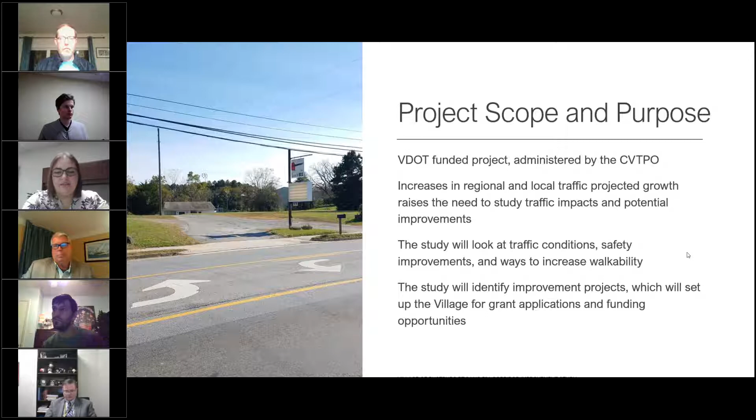The project purpose and scope: this is a VDOT funded project which is being administered by the Central Virginia Transportation Planning Organization. The need for this study has been increased by regional and local traffic and the growth that's projected. So the study will look at traffic conditions, consider safety improvements, and ways to increase walkability and multimodal access. The study will identify improvements that will set the village up for funding opportunities in the future. This initial meeting is really to get your feedback on the issues you've seen and the concerns you may have, and then we can move forward in identifying what improvements can be made.

Starting here, we're in the initial phase, which you can see on the left-hand side of the screen, which is doing the initial traffic analysis. We will go on to create the study and make plans, seek funding for those, and eventually get to construction. So we're in the pretty early phases of the project, and this is the best time to start getting your feedback on what you would like to see in the future.

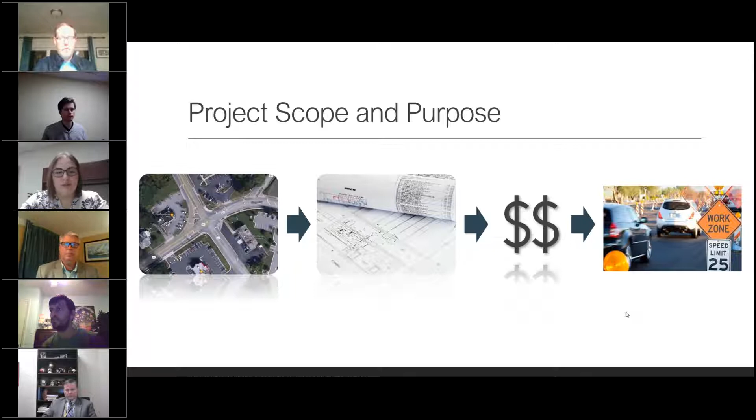So I'm going to hand it over to Bill, who's going to continue on.

Okay, thanks, Ada. As we go through the presentation tonight, really the purpose of this is to get your input. So please think about questions you might have and the type of input you might have. What concerns you about the corridor? Would you want to bike and walk more in the corridor if it was more accommodating? Are there specific locations that are of concern? Overall, what kind of ideas might you have for improving the quality of the corridor in terms of congestion reduction, safety, and the ability to walk and bicycle in the corridor, and whatever else comes to mind. That's what we want to hear.

So thinking about Rustburg, let's start really high level here. The town has been there quite a while, since 1784.

Looks like Bill might have some connectivity issues. Is anyone else getting that? Some connectivity issues? Not hearing Bill either. Okay, I can continue on for where Bill left off, and then once he jumps back in, we will let him go.

Just a little history and context of Rustburg: it's been here since 1784, when Jeremiah Rust donated the land for a courthouse and a jail. The village of Rustburg has grown to include a complex of administrative buildings, local businesses, and nearly 1,500 residents. The village is designated as an activity center in the Campbell County Comprehensive Plan, which indicates that it draws people.

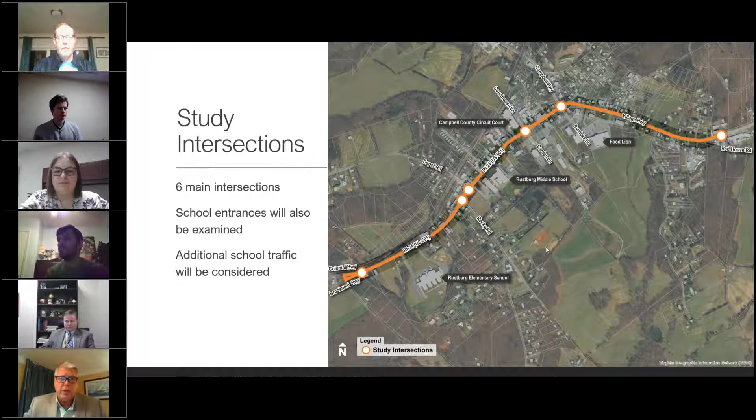I think there might be a delay on your end, Bill. Yeah, there must be. Okay, thanks.

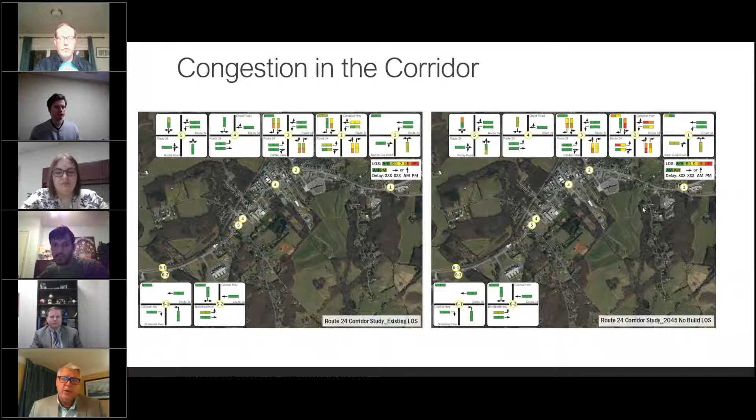The image on the left here, we see a lot of yellow and orange around the key intersections of Carden and Campbell Highway, so you're probably familiar with experiencing some delays there in the morning and evening commute peak hours. Then the image on the right is where we plug in the future volumes that are projected, and we start to see more yellow, orange, and red. So the more orange, yellow, and red you see indicates increasing congestion. We already know going forward there's going to be more congestion, so we need to get out in front of this from a planning perspective to figure out how to address it most effectively.

Next slide. Bit of delay on my end.

In addition to congestion, we're thinking about safety in the corridor. Are we experiencing crash issues? Is the corridor overall safe to drive, walk, and bicycle in? Next slide.

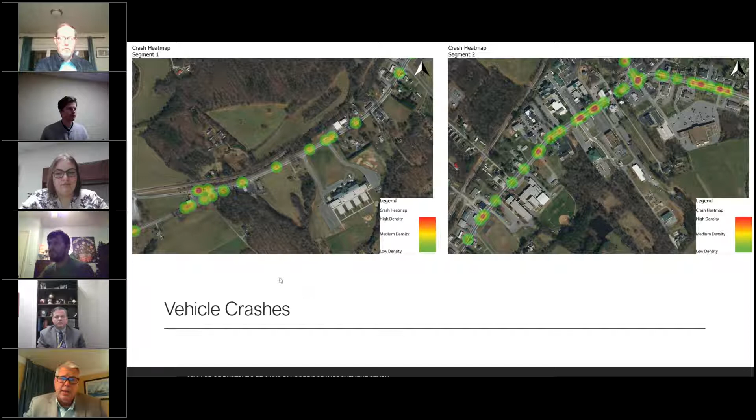Now this graphic is a different way of looking at it, called heat mapping, where we've mapped the intensity of crashes. We start to see places along the corridor with the highest crash history. The red indicates the higher crash history, around Carden and again around Campbell Highway. Interestingly, on the image on the left side where Colonial Highway comes in from the west, we see a concentration there too. So these are just some of the things we're looking at, and we want to hear from you about your observations of the corridor, from the people who use it frequently.

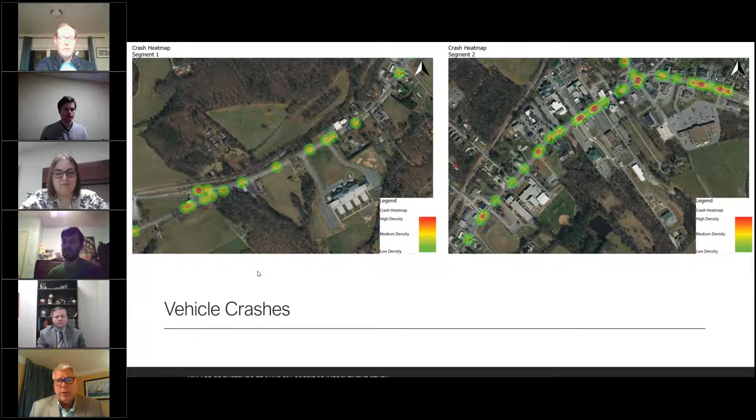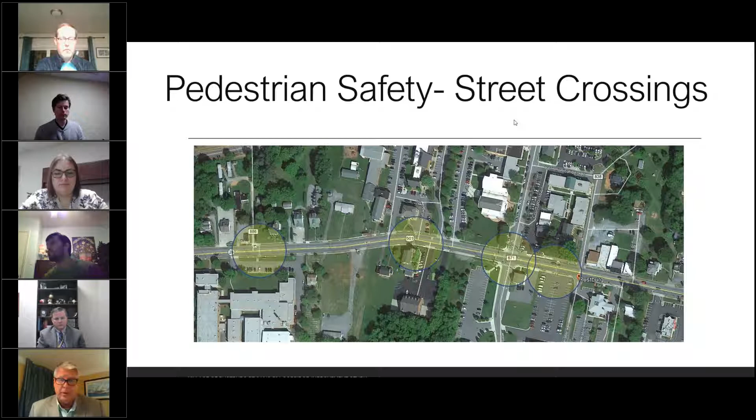Apologize for the delay here. This graphic, those yellow circles, are highlighting crosswalks through the core of the village. The point of this slide is that historically this has evidently been where people want to cross the road. So part of the question is, how comfortable and how safe do you feel doing that? Are these the right places to cross, or are there other places that are frequently crossed by pedestrians?

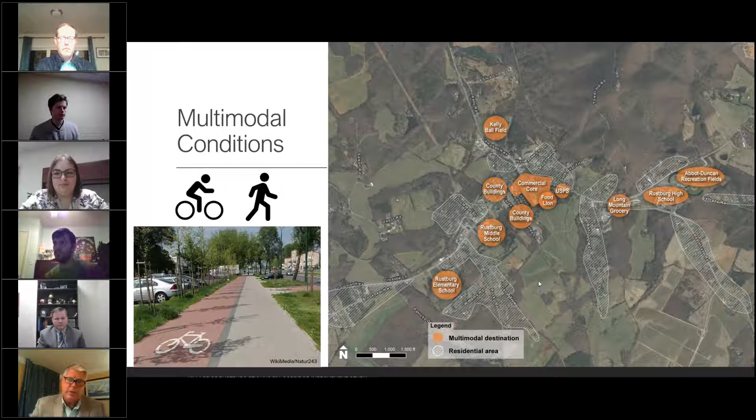Ideally, it would be comfortable for the residential areas to be able to access the commercial and institutional areas. So think about where you might want to walk and how you might want to get around on foot or bicycle. We'd love to get your input on that.

Also, when we think about the corridor as a whole, we're looking at traffic congestion, safety, multimodal mobility, but we're also thinking about whether there's a need to beautify the corridor in terms of streetscapes. These are great improvements to help enhance the overall sense of walkability. They can also be drivers of economic activity - helping a commercial district look more vibrant, attracting more economic activity, improving the tax base, and improving the overall quality of the village. So we'd like to hear your thoughts about that.

And as we seek your input, this is one opportunity tonight. We're here at the very beginning of the study process, and we have a survey tool that's available. It's very effective, and David Cook from VDOT is going to give you a tour of the survey tool.

You ready to share your screen, David? Yes, I am. Thank you, Phil. Okay, pass it over to you. And I want to confirm that everybody can see the CVTPO homepage. Yes. All right, good deal.

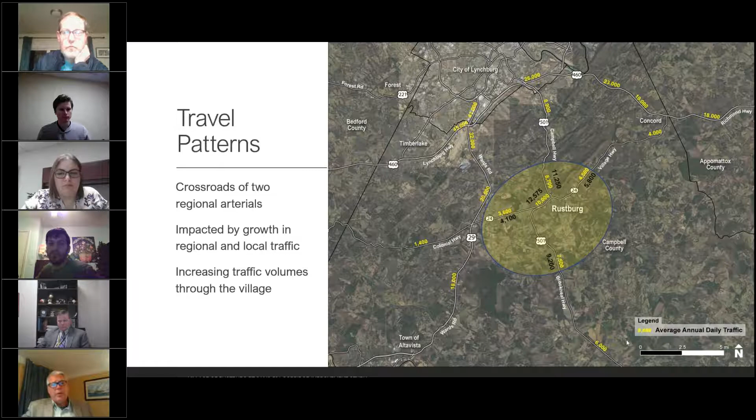Sure, maybe I could go back to the volumes slide. The need for this study really hinges around trying to make a safe travel environment, trying to get out ahead of any congestion issues, trying to reduce the number of crashes that occur, and trying to identify opportunities to make the area more walkable and friendly for pedestrians. When you put that all together, that culminates in a more vibrant village area, more economic activity, overall more livable.

To rephrase the question of how big of a study it is, they were asking how much will this impact the people in Rustburg. Yeah, that's a good question.

Every major transportation investment starts with a planning study. Planning studies are used to identify these types of improvements that can then be fleshed out in greater detail and put into grant applications.

I'll cite a study from Appomattox that the MPO conducted with VDOT, I believe about 7 or 8 years ago. It was a $25,000 planning study, and it went into the grant process. David and Rick, please correct me if I'm inaccurate, but I thought it was about a $10 million grant or so that was awarded for various improvements along the old Courthouse Road corridor.

So again, it's an investment on the front end in planning to identify these types of solutions that can be carried forward into grant applications. It could be millions and millions of dollars down the road that result from the ideas that come from this study and get documented.